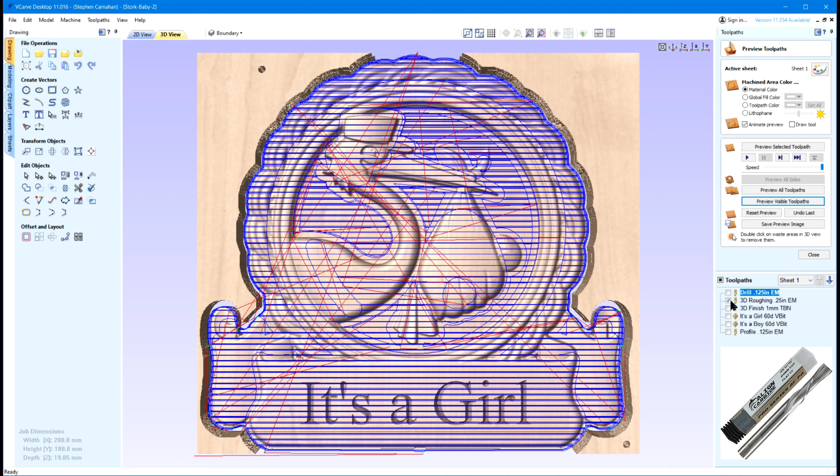The second tool path uses a 1/4 inch flat end mill and is a roughing pass. It removes the bulk of the excess material from the model. The third tool path uses a 1 millimeter tapered ball nose. This path will smooth and finish the surface of the model. The fourth tool path uses a 60-degree V-bit. It's for engraving the text.

And finally, the fifth tool path reuses the 1/8 inch end mill that we used in path 1 to cut the model out. I got this model from cnclipart.com, and I'll provide a link in the description if you're interested.

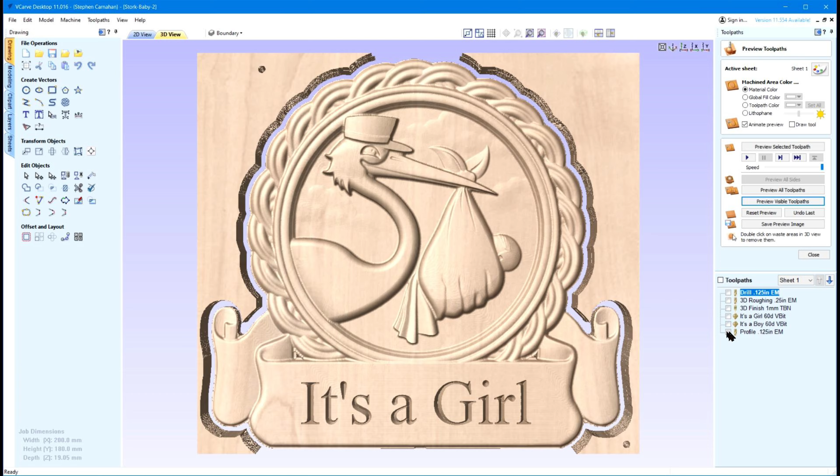Okay, so now I'm ready to go over to the CNC machine and load some of these files up and get set up for cutting. This is where the double stick tape comes in. I'm using a combination of tape and screws to secure the wood, and the tape makes it so that I don't need to use tabs and have to clean those up after the fact.

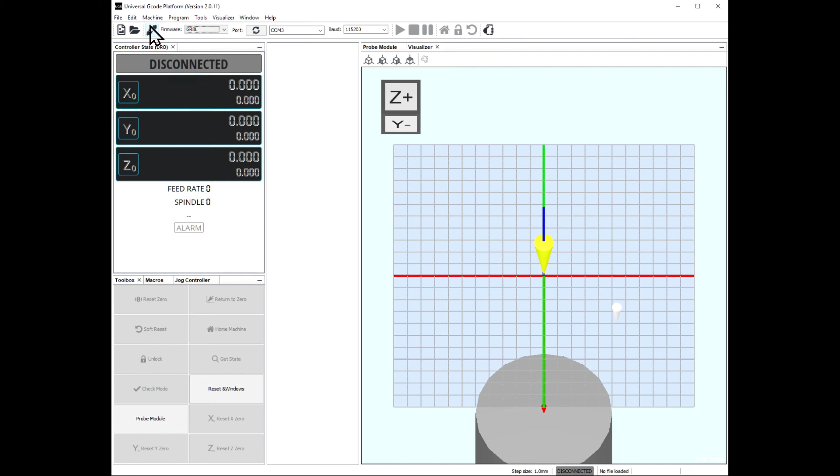Okay, this is Universal G-Code Sender, which I'll be using to send the tool paths to the CNC. I first need to connect to the machine and then home the machine. Okay, now I'm going to open the first toolpath file and get it ready to cut. I've also lined the bit up with the wood and set my 0 point.

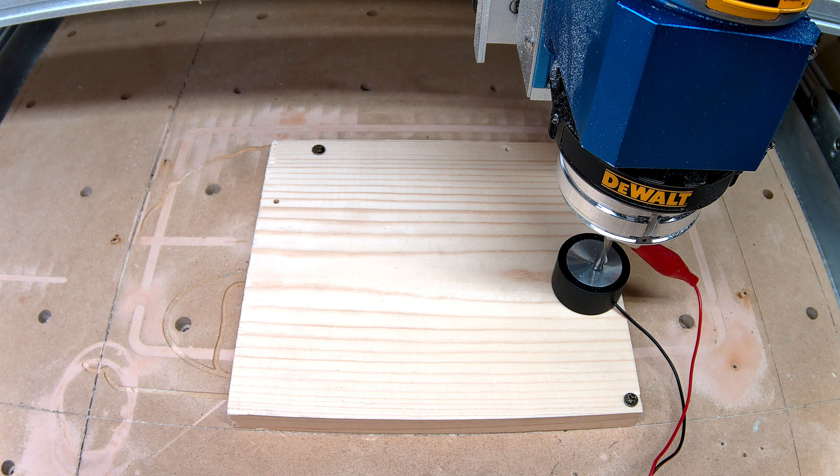Now that my holes have been drilled and my board has been better secured to the CNC with screws, I'm going to replace the bit with the 1/4 inch end mill and get ready for my second tool path. But first, I need to zero out the Z-axis. Okay, now we're ready to load up the second tool path and do the rough cut.

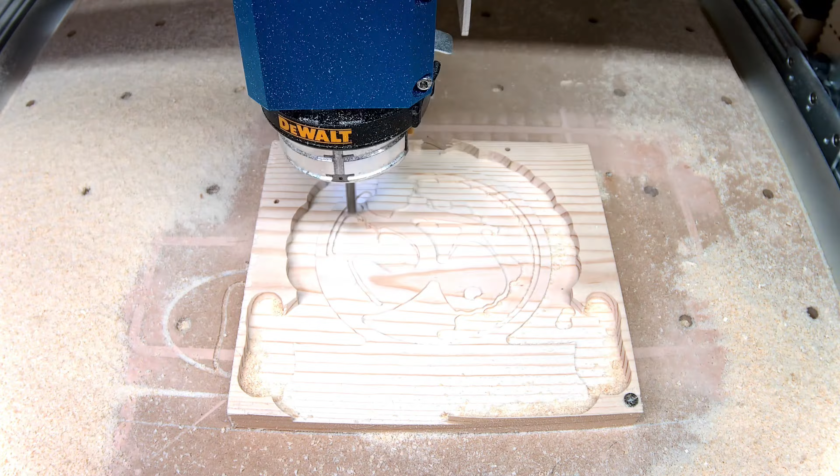Okay, that finishes up the rough cut, and I'm getting ready to do the finish cut with the tapered ball nose. I've got that bit in the machine, I've zeroed it out, and I'm ready to go.

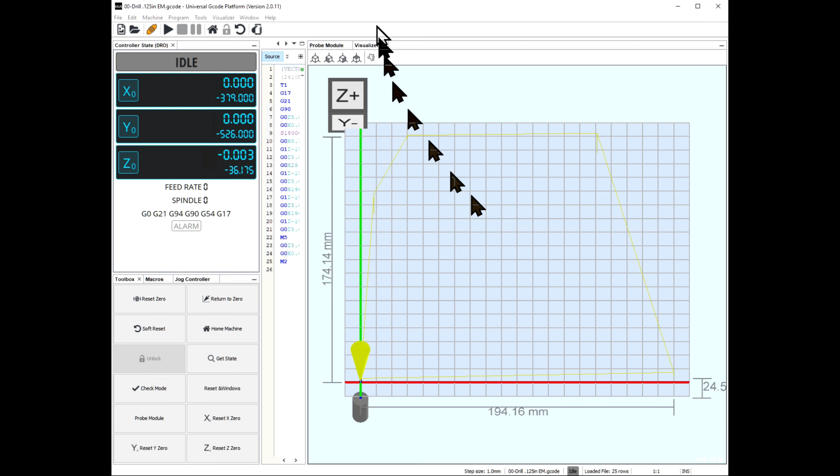That looks pretty good. Next up, we'll be carving the text. I've already put the 60-degree V-bit in the machine, and I've zeroed it out, and we're ready to go.

Okay, we're ready for the final cut. I've put the 1/8 inch end mill back in the machine, zeroed it out. Let's do it.

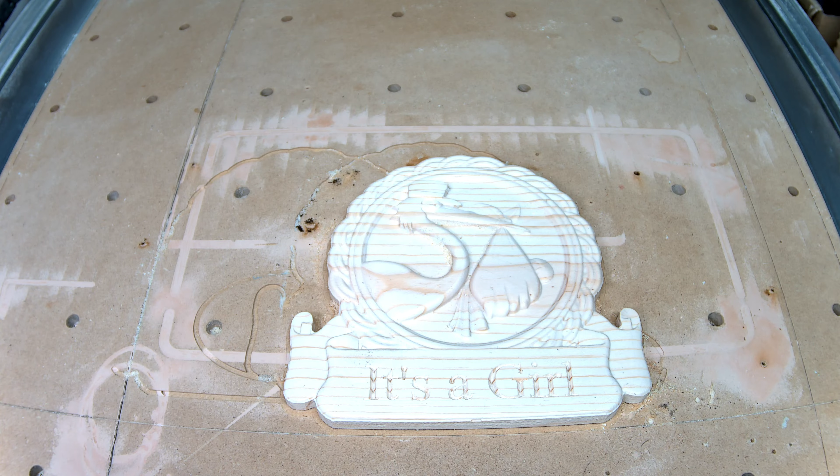Now we'll find out how well the tape did. I didn't see any movement and everything looks good, and it's actually holding quite well, so I'm pretty happy with this tape. I think I'll be using it in the future.

Well, that's it. After a light sanding and a little bit of spray glaze, I think it turned out pretty well. I think she'll be happy with this.